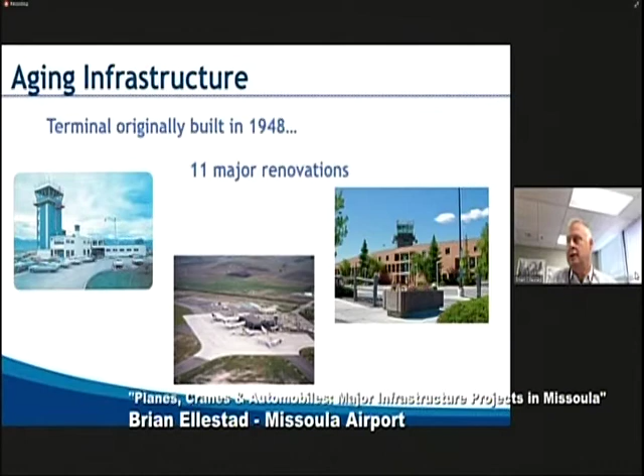Here we go. Our terminal was built back in 1948, so it was a very aging infrastructure. As the engineers like to say, we had 11 major renovations. We may have started off with some blocks, but then we added tinker toys, some Lincoln logs, an erector set. It was just impossible to add any pathway for IT, so it was time to freshen things up.

We've grown—since 20 years ago we've almost doubled in size, and a lot of that growth has been within the last 10 years. We added 4 new airlines, 10 new routes, and much bigger aircraft. Our hold rooms were built for 19 or 38 seat aircraft, and when you have 196 passengers in a hold room, as you guys know, it's tight.

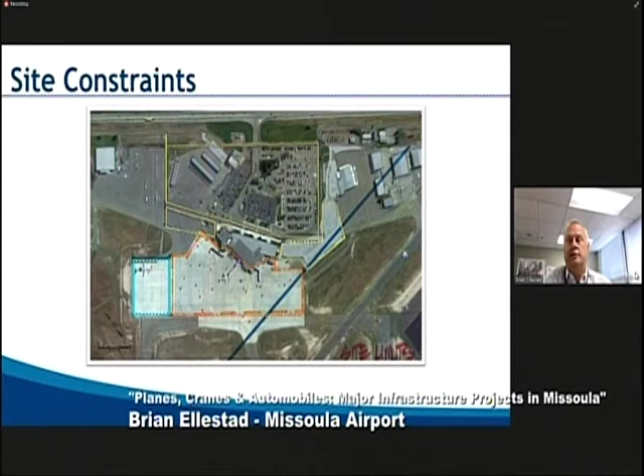Our site has Highway 10 to the north, our ramp to the south, and Minuteman to the east and west. So we were tight on where we could build. We had to make everything fit without moving to a completely different green site.

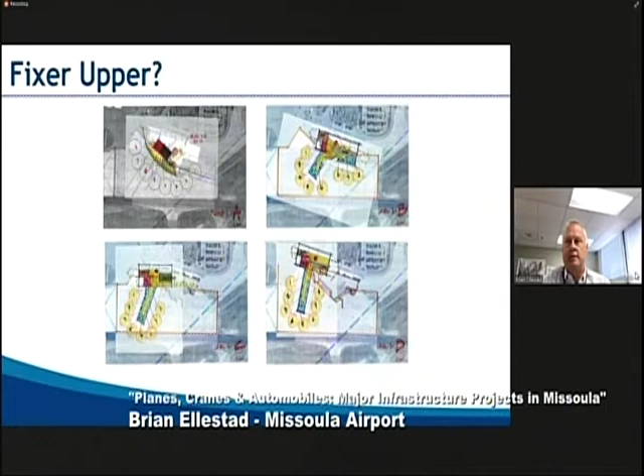We did look at whether we could do a fixer-upper. It worked—our terminal is probably the right size, but the size is all in the wrong places. Small hold rooms, but a spacious lobby at the time, and there was just no room for expansion. So we decided it was time to bite the bullet and do it right.

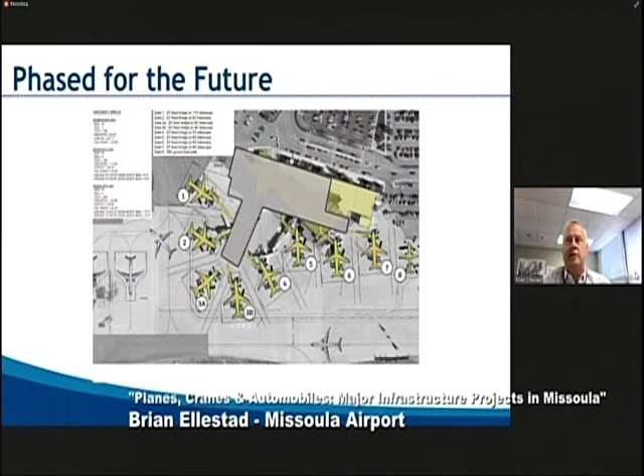So that's kind of where we are now. This is an overlay of the first phase showing how it would lay over the current building. As you can see, we knocked down the first TSA checkpoint, and eventually we'll knock down the entire terminal.

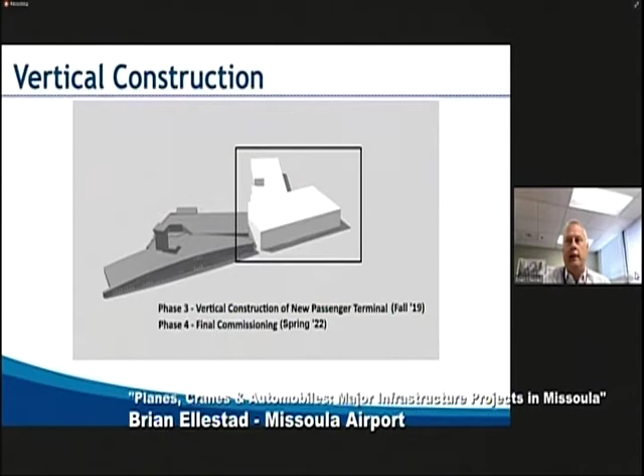The first phase was to make a green space. We knocked down the TSA checkpoint, and that's where the building you see today is, where we moved the checkpoint to the middle of the terminal. We're now under final design for the next phase, and for illustration purposes, we'd keep the rental cars and baggage claim in a different area, but that's where we would build.

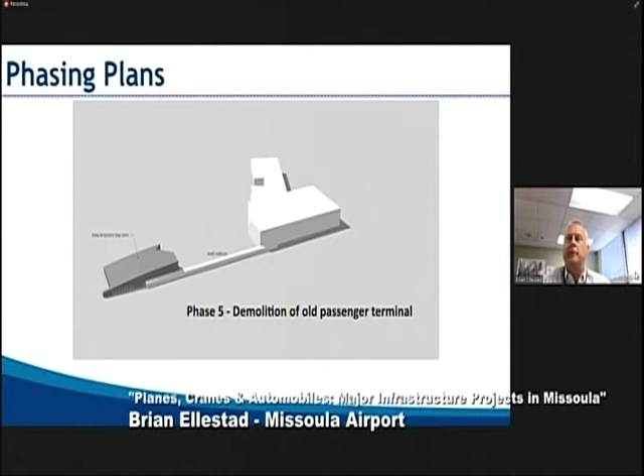Then it's just room to grow—we can add blocks onto any end versus being a fixer-upper where we were stuck with nothing more we could do. So for the people that follow us, we wanted to make sure it was easily expandable.

Here you can, here we go. One more.

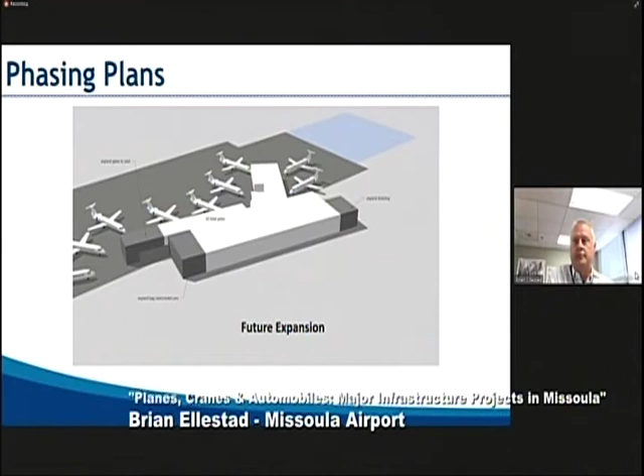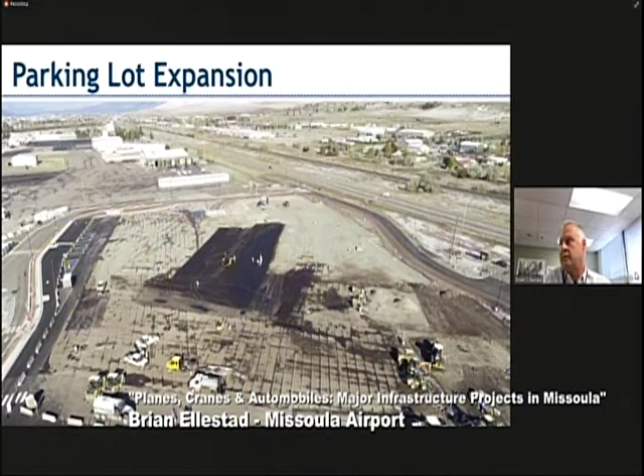One thing we took care of while we had a lack of customers is we started growing the parking lot. If there's a good thing about COVID, we were able to phase this in a way that we could just do one big project. So we've been slowly growing our parking lot, and now we have 300 parking spots. Melissa, is this still coming across okay?

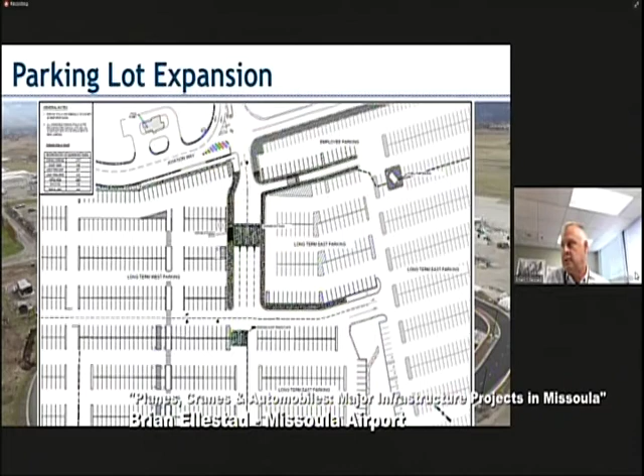Yep, it sure is. We're growing through 300 parking spots, and for customer service convenience, we're relocating the exit plaza. Right now, for almost 1,200 parking spots, we just have a single exit with 2 booths. It just isn't enough, so we're expanding that this fall.

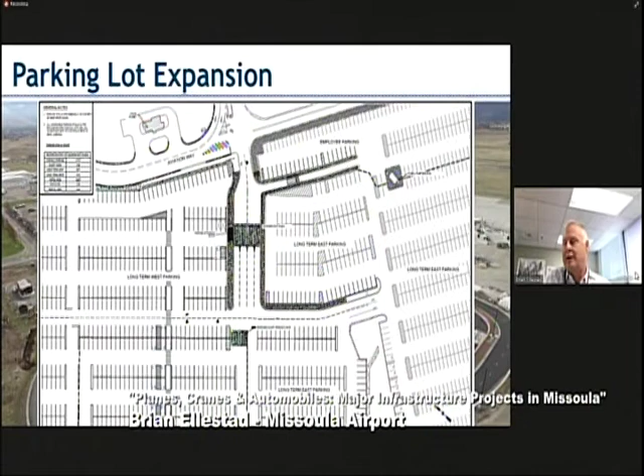We'll go from 2 booths to 4 exits. The last thing you want when you come to the airport is to get off an airplane and wait to depart, so we're trying to make that easier for our customers and straighten out the line. Right now parking is all cross directional, so we're trying to make nice straight lines, easy to find your car upon arrival.

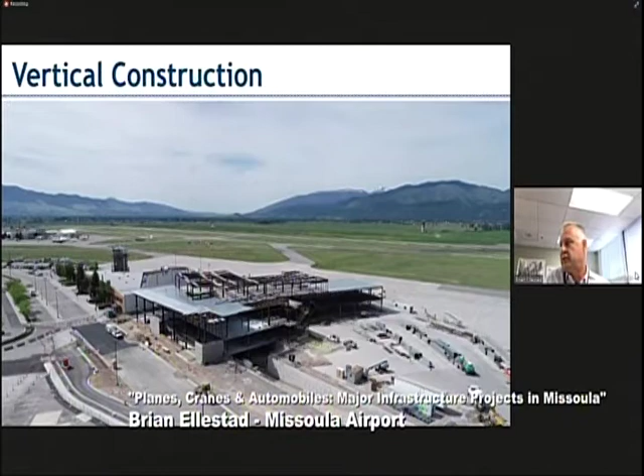For infrastructure, here's the building as it kind of came out of the ground. You can see the loading dock, which I'll talk about later, off to the lower part of your screen. That's for all supplies that we'll bring into the building. But the building just kind of grew and grew, and this is what you see today if you were to drive by.

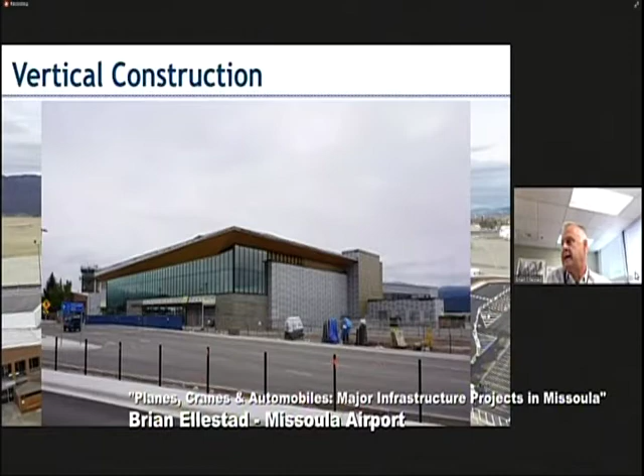The siding's going on, most of the glass is in. We're starting to see studs on the inside, so it's starting to take shape, just starting from the basement going up, long hallway.

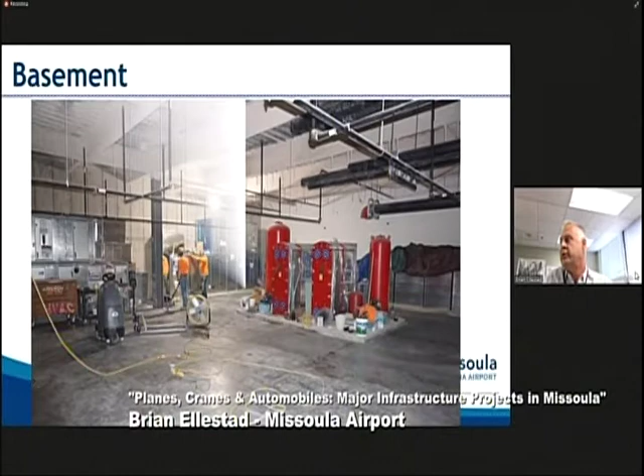In the basement, we have geothermal for heating and cooling, so that's one of the infrastructure things going on. You can see here the electrical room with all the cable trays. This is something we didn't have before, and it's much easier to bring IT throughout the building.

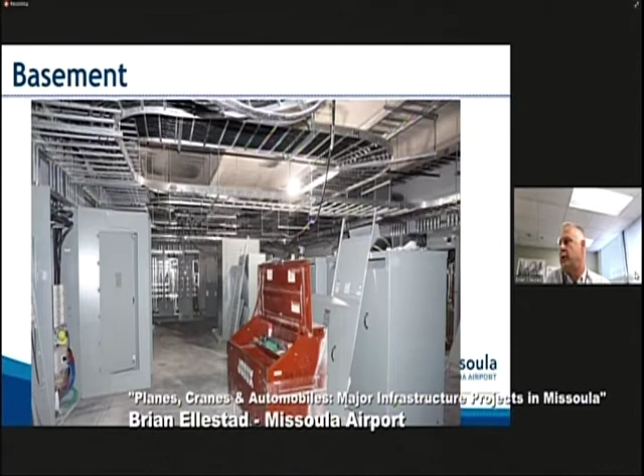And there's our IT room, where all the airlines and infrastructure for our backbone will be. This is the long hallway in the basement where all of our deliveries will come into a screened area. We want to get delivery trucks off the front curb so it's much easier for customers to pick up their loved ones upon arrival.

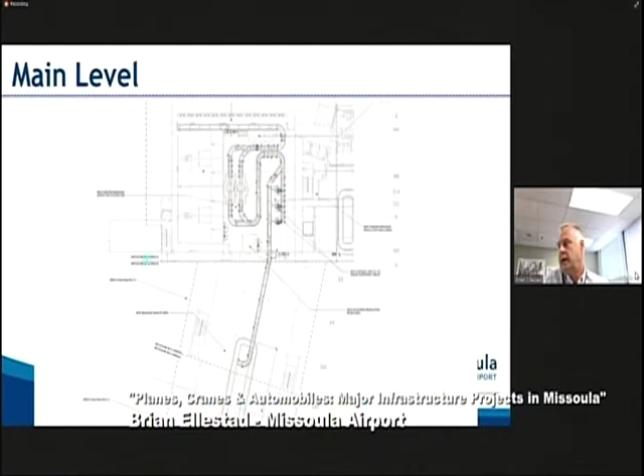This is the airline room where all the airlines will pick up your checked luggage. At the top of the screen is where all the ticket counters are. You'll drop your bag off behind the ticket counter, so you won't have to check your bag and go find a TSA checkpoint. You'll drop your bag and it'll be screened behind the house, then the airlines will pick it up in a separate room to be delivered to the aircraft.

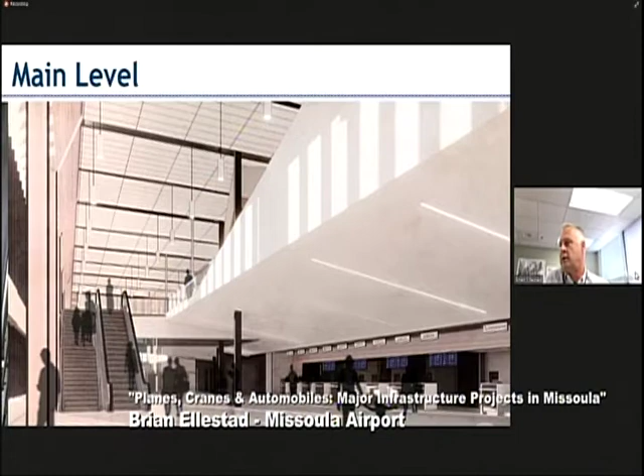Here's some inside shots. This is where all the ticket counters will be. You can see what it'll look like once all the drywall is in and the escalator is operational.

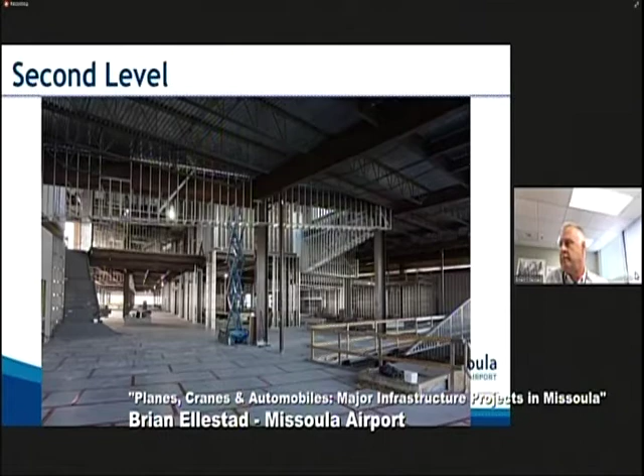Second level, that's the future TSA checkpoint. This is where the TSA checkpoint is on the right, and where the meeters and greeters will meet their loved ones or business associates coming in. This is a stairway to an observational deck, which I'll go on about shortly. There's a view of the meeter greeter area, and then an observation deck, which we're pretty proud of and will talk about later.

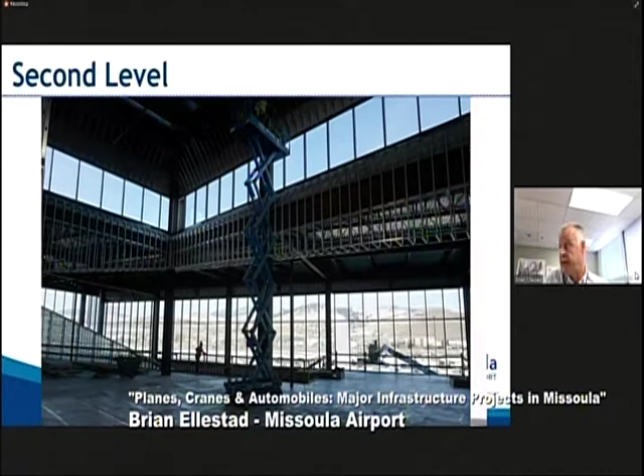Again, the TSA checkpoint, what it'll look like with drywall. Everything's going pretty quick. This is all for arriving passengers. This is the view they'll see as they walk off the airplane and go down to baggage claim.

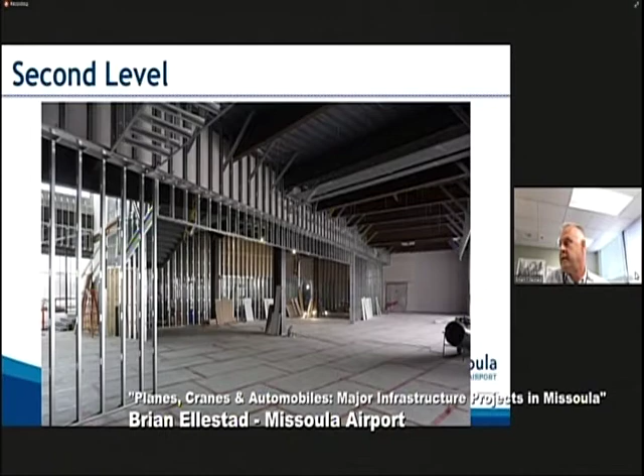This is our concession area in the secure area. We partnered with local brands, so the Kettle House Tap Grill, and another view of it from a different angle where you'll actually order.

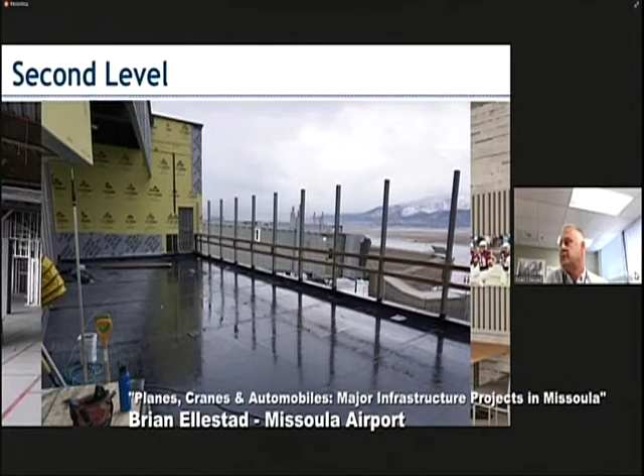This is our popular outside deck. We made sure we incorporated that in this new design as well. There'll be a fireplace in the corner, and through those plastic sheets, there are now windows since I took this picture. The bar is right next to it, so you can go out and have a nice beer while you wait for your flight.

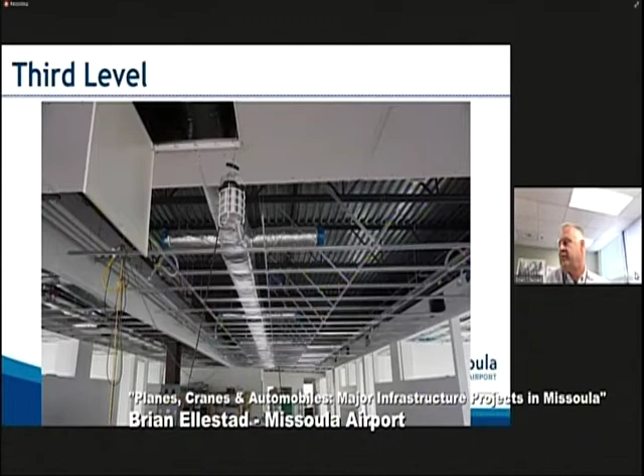This is our third level admin area. And again, just some more pictures.

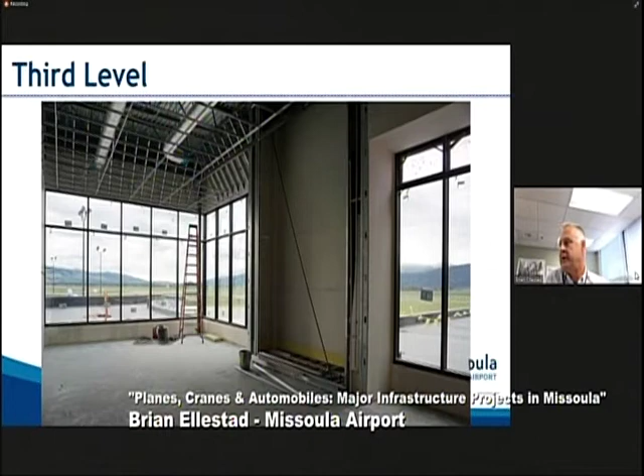This is the observation deck. Right now, one of the issues we have is people can't see airplanes arriving - there's no place to look at the airfield pre-security. So this will have a fireplace, and we'll pipe in the tower frequency so you can hear planes land. For aviation geeks, we'll have a Jeppesen chart so you can watch the flight paths of aircraft.

There's some soft seating up there, and an elevator - escalator, I should say.

Again, some more pictures. One of the things for customer convenience, we were all about the views, so we're installing electrochromatic glass - no blinds in the new terminal. Everything will be self-tinting, so if you want to sit next to a window, it'll reduce glare and reduce heat. The big thing is no shades or blinds. This is a nice addition that we felt was very customer service oriented.

The next program is our RSIDs, the Rural Special Improvement Districts. Those are primarily focused right now on our sewer and water systems, and we have 4 systems that we work with.

We have a staff of 7 individuals: a superintendent, an RSID operator, 2 full-time operators, and then 3 part-time operators. Those 3 part-time operators cover some hours on the weekends or when the other operators can't be there.

The systems we operate and maintain: in Lolo we've got a sewer and water system, with 1,115 residential connections and 30 commercial connections. It's a pretty decent sized system.

In Elmar, we've got a water system serving right around 500 residential connections. They used to have sewer and water, but once the city pushed the sewer out along Mullan Road, Elmar jumped onto that system and we shut down the sewer system out at Elmar. If you don't know where Elmar is, head west on Mullan Road, right across from the golf course.

Lewis and Clark is a small system out in the Clinton area, 42 residential connections, with sewer and water. We just did a big upgrade on their sewer system this last year.

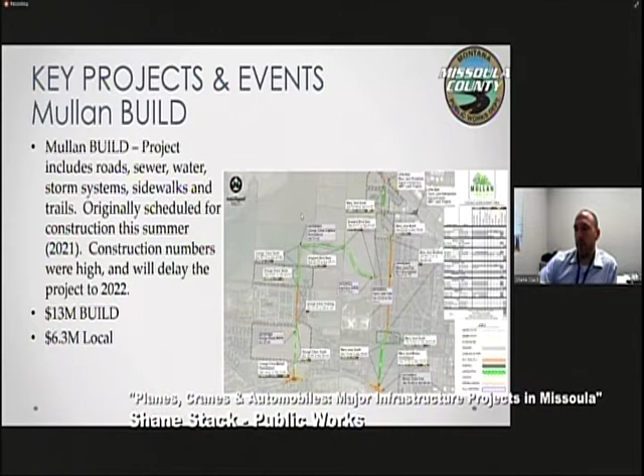Right now we have around $19.3 million to build infrastructure out there, working with a contractor through a CMGC process. At our 100% design, the latest numbers were right around $22.8 million, and we've only got $19.3 million. At our 95% numbers we were close to that $19.3 million, and I was confident we'd stay on schedule, but as of right now those numbers are significantly higher than we can afford. So at this point we're going to delay construction to 2022, but I think we'll be able to build all of it in that 2022 construction season.

Federal Lands Access Program: these are 3 projects the county has submitted applications for FLAP funds. Western Federal Lands has funding available for cities and counties that have facilities leading to federal lands. Living in Missoula County, there's plenty of federal lands out there that our county roads lead to, so we have lots of eligibility. We've applied for 3 different projects.

One was 9 Mile Road, 11 miles of road rehabilitation—improving that gravel road from around the 6 Mile area, Conifer Drive, where it goes from pavement to gravel all the way to Kennedy Creek Road. That's a pretty sizable project. We were asking for $4.5 million in FLAP funds, with our local match around $700,000. Construction would be anywhere from 2 to 3 years if we're selected.

You have to remember there's $48 million in available funding through this program, and a lot of counties and cities in the state will be applying, so there's no guarantees we're going to get this funding. We've just applied for it.

The next project was Sawmill Gulch. If you're familiar with the Rattlesnake Trailhead, if you turn off Rattlesnake Drive you'll find a short segment of roadway leading to the main trailhead—that's Sawmill Gulch Road. For that first quarter mile, we'd look at widening it and adding some on-street parking. For the remaining mile, just past the intersection with Rush and Joe Road, we'd widen it from a 14-foot top to a 20-foot top and create a cul-de-sac at the end so trucks can turn around and we can start doing winter maintenance. I've got a visual for you on that.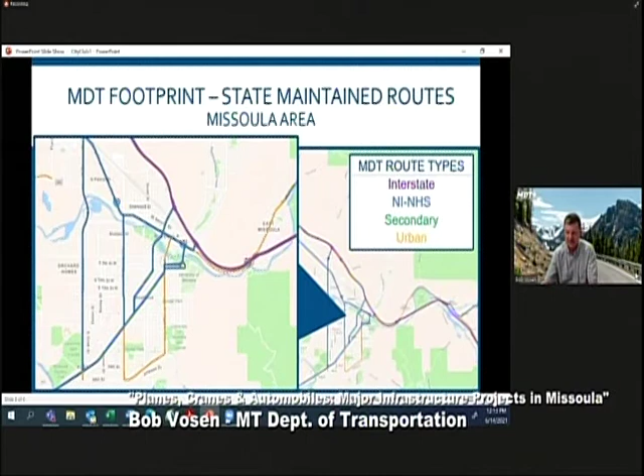We do have a very good partnership with the city of Missoula and with the county. As you can see in these images, just some of the roads that we're in charge of are not only in the city, but with the county as well. We also share those projects, and we need to make sure we're coordinating closely together, meeting the needs of everyone.

So the next slide I've got here is the upcoming MDT projects in the Missoula area, upcoming and current. The first one here is the Reserve Street Concrete Rehab project, which is generally wrapped up at this point. We still have striping and some final cleanup work on that project.

The other project that is just a tremendous project, very exciting, is this Higgins Avenue Bridge project, where we've completed essentially one half of the project. Vehicles and pedestrians are able to use the new bridge right now. The wider shared use, multi-use path on the west side is an exciting change and improvement for the users down in the downtown Missoula area. Just a great project, we're really happy to have going along.

Another project in this area is the next phases of Russell Street, completing the southern part, and then we also still have to finalize the intersection with Broadway. Another challenging project in the highly urban area. We're in the design process right now, but looking forward to bringing that project forward soon.

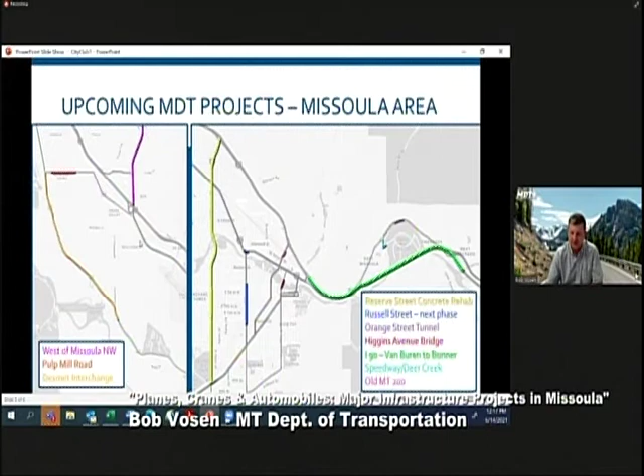Thanks, Bob. It's so neat to see the range of projects across Missoula County. I know we're going into construction season and summer, and while there's a little more traffic now, it's so nice when they are done. So thank you for all your work there. With that, I'll turn it back over to you now, Brett, to introduce the Q&A section.

Hi, can you at least hear me? I don't know if you can see me. Yep, can hear you. Okay, I turned my camera off and I can't get it back on, but I'll figure it out. At any rate, thank you, everyone.